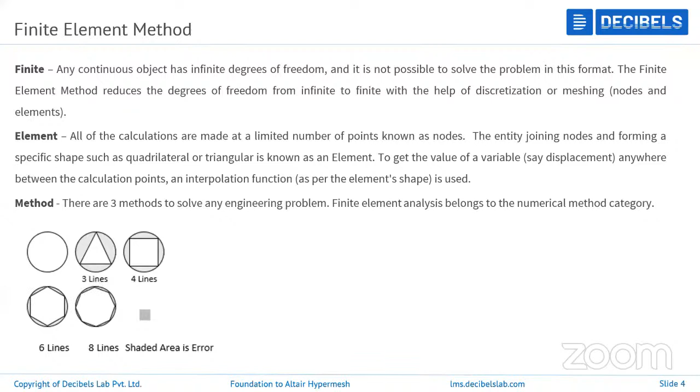Since we are using HyperMesh as our preprocessor, all our major work will be done in HyperMesh, starting from importing the CAD. HyperMesh is a pre-processing CAE software, and this is not a design software. The design software are separate, like CATIA, UG, ANSYS, and so on. The CAE softwares are HyperMesh, ANSA, ANSYS. So these are the pre-processing softwares.

So basically, in Altair HyperMesh what we are using, first we will import the CAD. For that CAD, we need to do some cleanup as it is done in the design software. So we need to modify or edit the geometry as per our requirements.

After doing the geometry cleanup and all, we are going to create the elements on it. That is called meshing. Meshing means we are going to create the elements based on the component or based on the requirement.

For example, we have 1D, 2D and 3D elements available in HyperMesh to build any kind of geometry. From the 1D component like a bar element, rigid bar element, beam element, to sheet metal components which are the 2D components, to the solid ones. By using these 3 kinds of elements, we can build any kind of meshing or model. After doing the meshing, we are going to assign the material properties based on the project requirement and based on the component.

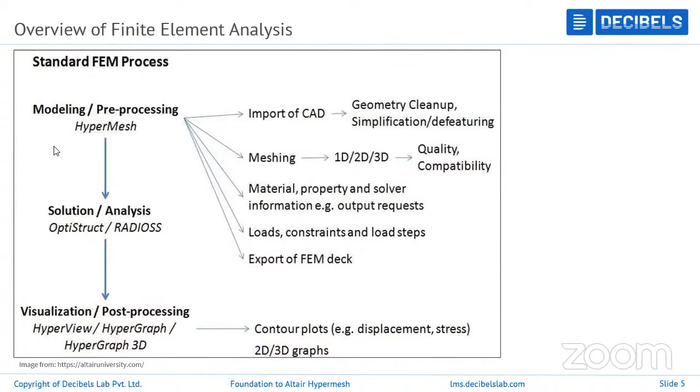This is the standard finite element process that every CAE industry is following to build any model from scratch to the results. This is the process which we are following.

The designer is going to build something, then it will go for manufacturing, and then for production, then for distribution it will come. So what is the necessity of CAE? The necessity of CAE comes from the earlier sections, or in the previous years.

A designer will build the CAD data, and it will come for the virtual test, then it will go for manufacturing. After the manufacturing, the prototype test will be done, like before releasing any automotive parts or anything.

Now the CAE industry has occupied everything rather than just automobiles. Say for example, for mobile applications or household applications, even for television sections, electronics items, it has occupied everywhere. So after designing, manufacturing, and building, we need to test it.

Say for example, a crash test or durability test, or any other test. So we need to create one prototype for that. Then we need to test that. Only after testing can we release it for the market. If it fails in the test, it will again come for the designing process. We need to follow the same steps again.

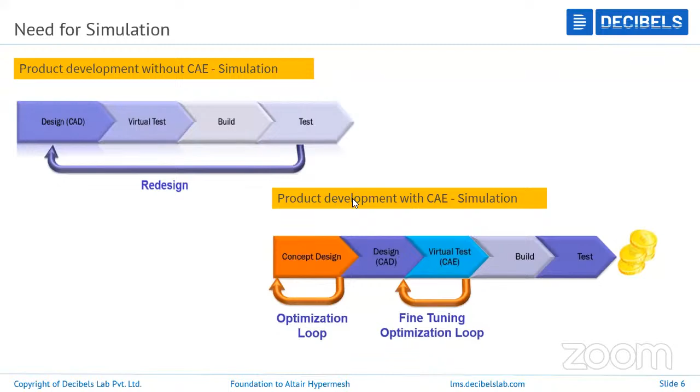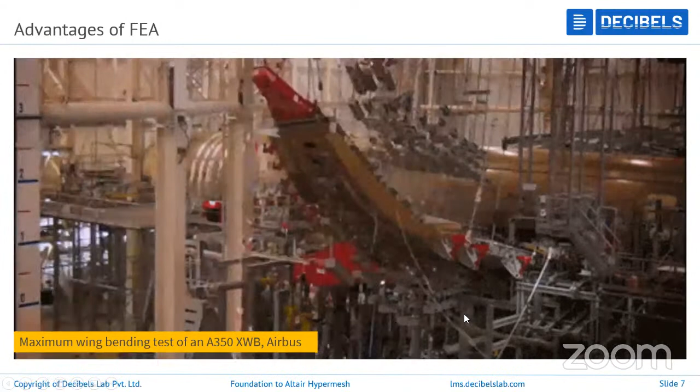There are so many processes if you are not using the CAE software. But the same thing can be done virtually using CAE software. As I said, you can change the stiffeners by adding ribs, changing or increasing the thickness, or using a higher Young's modulus value, all within the CAE software. This is a major advantage of using the CAE software.

So by using any software, you can build this and build the virtual test data. You can get all the data you want based on your priorities, then you can set it for manufacturing, then take it for the prototype. This is a practical example so that you can understand why we need CAE software. This is the theory, the fundamentals behind using finite element analysis or any CAE software.

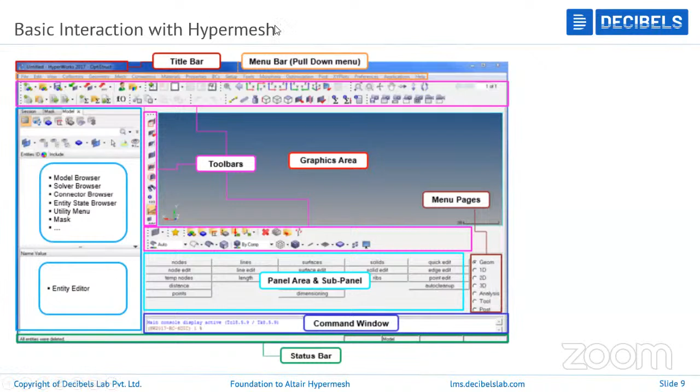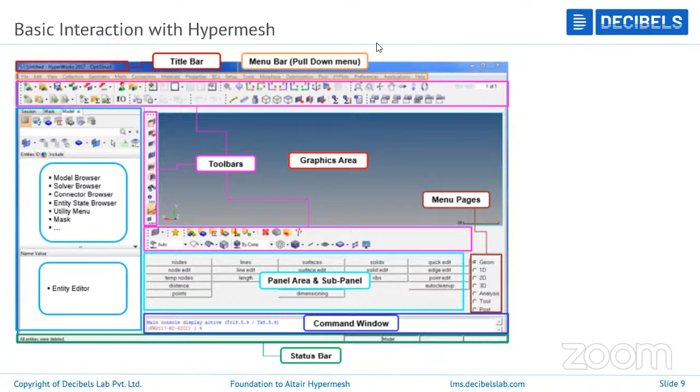Next, we'll move on to HyperMesh: what HyperMesh is and how the HyperMesh window looks. The image you are seeing here is how the HyperMesh window looks. Here you can see the version of HyperMesh in the title bar. These are the menu bars, and we also have toolbars. Here you can see the version of HyperMesh, and it is showing OptiStruct. OptiStruct is an Altair solver, a solver platform we are going to use to solve durability analysis.

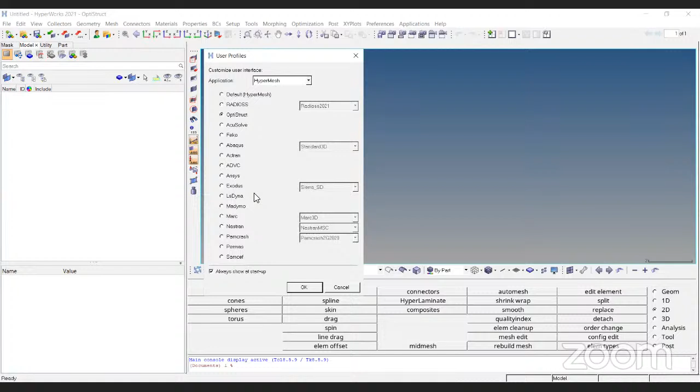If you click on the user profile, you can see all these different user profiles. Since HyperMesh is solver neutral, it supports software which is not built by Altair, that is, external software. These are the external software that HyperMesh supports. HyperMesh is a very good pre-processing software, one of the major software we use in the CAE industry. This is the profile bar, these are the profiles we can set, and this is the menu bar.

In the menu bar, you can see File. If you want to open a file, save a file, or open a new window, all these operations can be done in File. Then there's Edit and View controls. In View, this is the view bar, and you can keep whatever views you want. The same names will appear here also, like new file or opening a file. If you go to open a file, it will ask which file you want to open and the file type. It should be a HyperMesh file.

As we know, anything you want to open in any software, the extension should be the same. So for example, if you want to open an Excel file, it should end with the XLS format. So likewise, if you want to open the HyperMesh file, that should end with the .hm file. That's what it is asking. Then we can go for the saving option. Then the important one is the import export options.

These are the menu bars which are available in HyperMesh. See, the toolbar: if you are familiar with the toolbar, it is good to work with any software. This is a toolbar, and these are the periphery icons of HyperMesh. This is for the mask window. This is for the assembly, creating any collectors, or if you want to create any load collector, system collector. These are the periphery icons which we will be using very frequently. If you want to keep it in a part view, component view, or property view, these are the periphery icons.

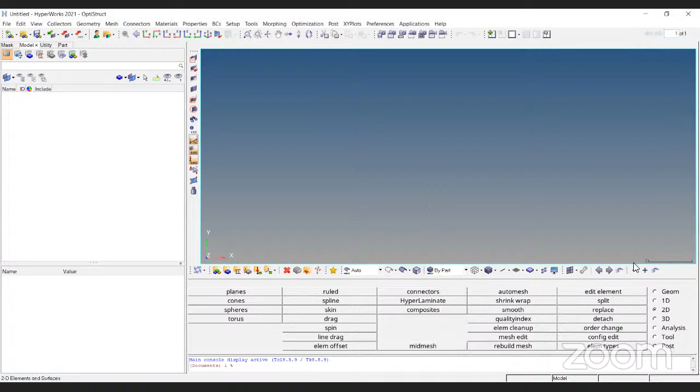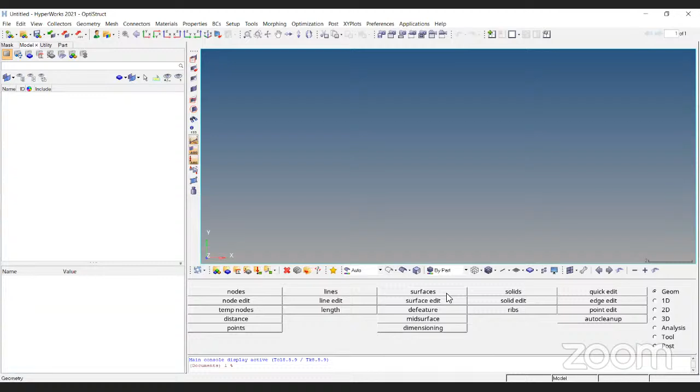And these are the different menu pages. If you want to work with the geometry, use the geometry page, or 1D page, 2D page, 3D, analysis, tool and post. These are the 7 different pages. If you click on any panel, say I'm going to use the surface panel, a sub panel will appear. It means inside the surface, if you want to create any surface or delete any surface, those things will be available in the sub panel. This is the panel and this is the sub panel.

Then if you want to run any macros, you can run it here using this bar. Then the status bar is there. This is the status bar. As you can see, I'm in the geometry page, so it is showing the geometry. And this is the model tree and entity tree. I'll show it in a different section.

As you can see, this is a model tree. The geometry includes surfaces, lines, points, nodes, everything. All things we are going to keep in components. We can see in the model tree components, load collectors, load steps, material data, property data. Every data will be available in the model tree. Then if you click on any particular component, the entity will appear. This is the entity view. Entity means inside the components there are other things, for example the name of the component, the ID, the color. If it is defined by any properties or material, those things will appear in the entity bar.

These are the main menu icons which we know in HyperMesh: status bar, menu bars, model tree, entity tree, and the panels and subpanels in the different pages. These are the basic menu bars we should know.

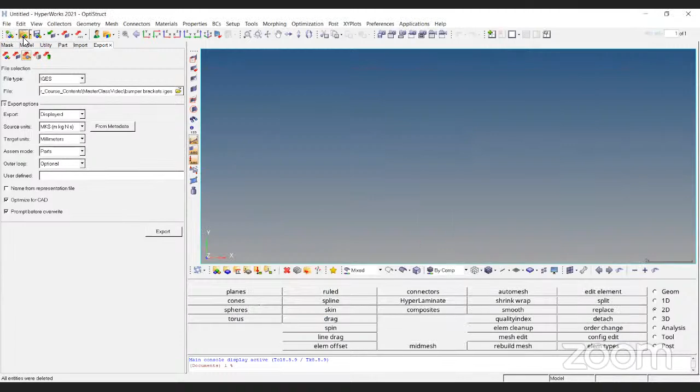First I'll go with opening the file. If you click on open file, it will ask whichever file you want to open. I'm just opening one file. Just open, set the destination, and select whichever file you want; it will open.

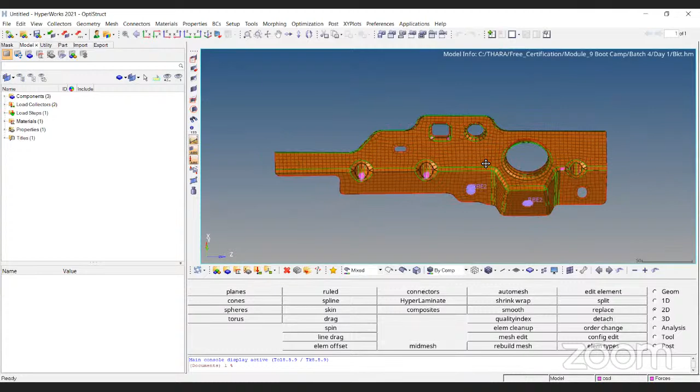As I said, the information will be available in the right corner. Just use the keyboard F button; it will fit to the current window. I'm using the Control button with the right mouse button just to move around the screen.

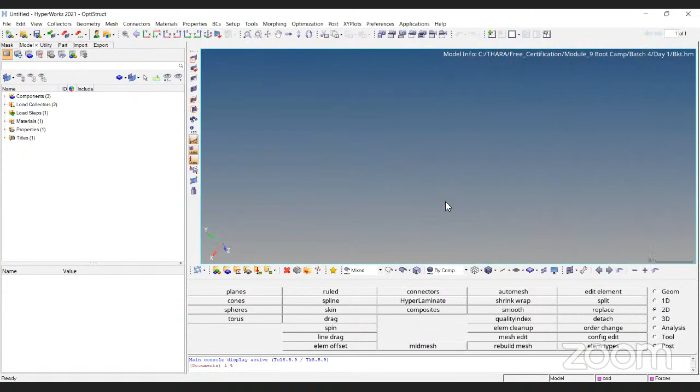Control with the left button, we can zoom in and zoom out. Control plus left button, you can do these operations. Then if you see this component, I'm zoomed so much. To bring it back, just press the F button; it will fit to the current window.

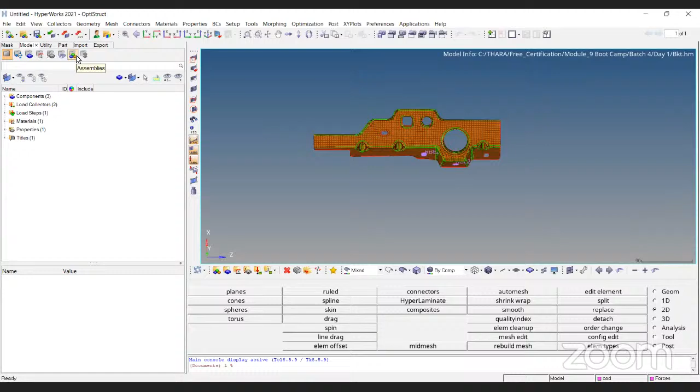For panning, to move around this window, you can use Control plus right button. Control plus left button is used for zoom in and zoom out. Then sometimes we need to fit it in some particular views. See, this view option is there.

You can set it to the XY plane, ZX plane, or ZY plane, or isometric view, top view, front view, like that. Whichever view you want, you can keep it in that view.

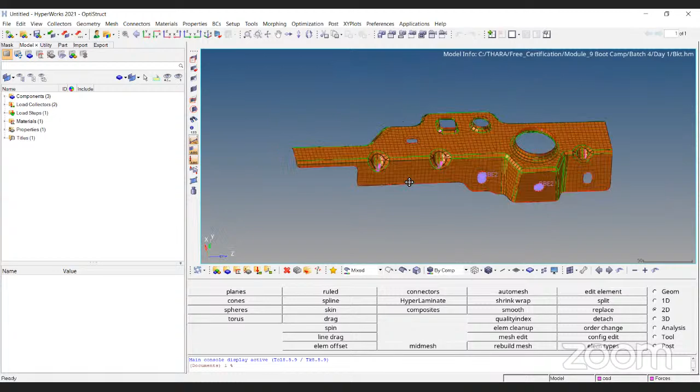Then what is a component? Basically, I'm having this geometry. On this geometry, I'm going to create some nodes or elements. To store the elements and the node data, I need something that is called collectors.

How to create the collector? You can go here and create. I'm going to create one collector. You can give the component name, set the preferred color, and say create. After doing this, the collector name will appear in the model tree.

See, here I'm having the three collectors. After creating this collector, it will appear in the model tree. Basically, the collector means I'm collecting the node data and element data. I'm storing these two in one thing that is called a collector.

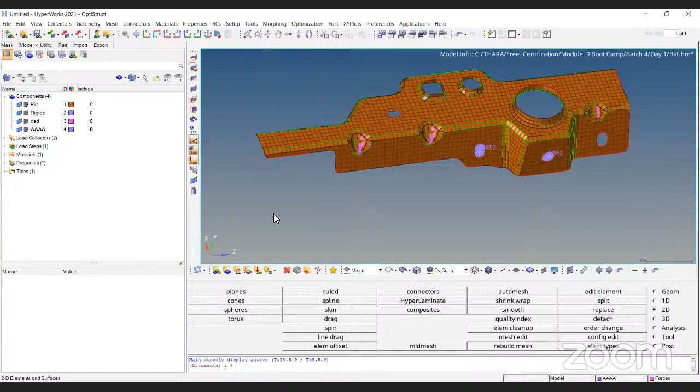In the collector, you can save the nodes, elements, or you can save the geometry also. The flag symbol you are seeing here is meant for the geometry, CAD, or surfaces, anything related to the geometry. If you click on it, I'll just mask the elements. I'm displaying only the CAD surface.

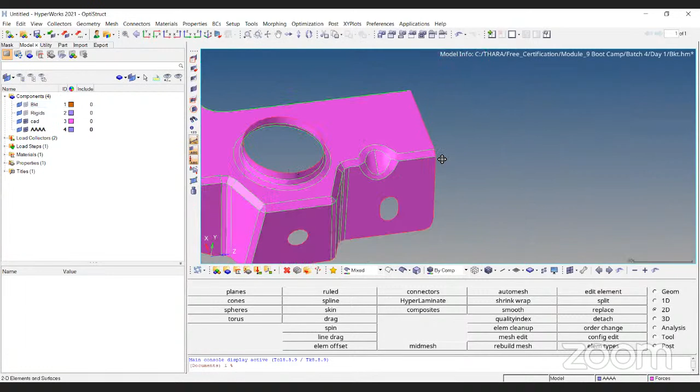You can see this is called the CAD. The flag symbol you are seeing here is meant for CAD. Representing CAD means it contains lines, surfaces, those things. Then this four-element box shape represents the elements.

If you click on that one, just do a mouse click, it will appear. If you click off, it is hiding, it means it is not showing these things. See, this is called the elements. This is meant for elements.

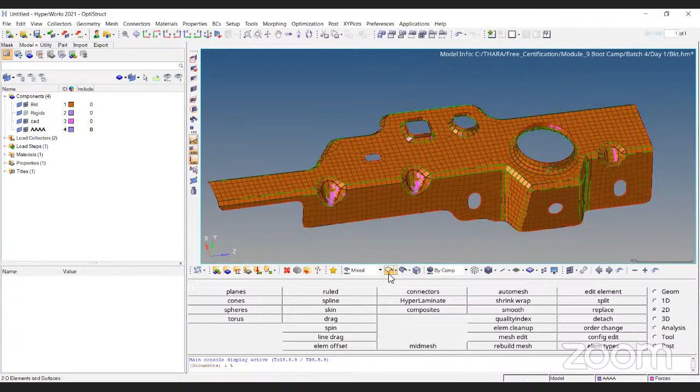The same elements you can keep in a shaded mode or wireframe mode. I'll show you. Now I have kept my geometry in a shaded mode. Here in the icon, you can keep it in shaded mode or shaded geometry. It means it is not showing any lines.

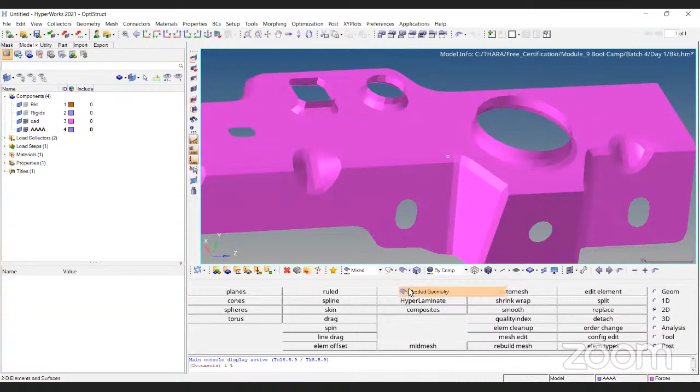So like this you can keep it, or else you can keep it in a wireframe. See, this is called the wireframe. In the wireframe, we can see only where the lines are. We can see only the lines.

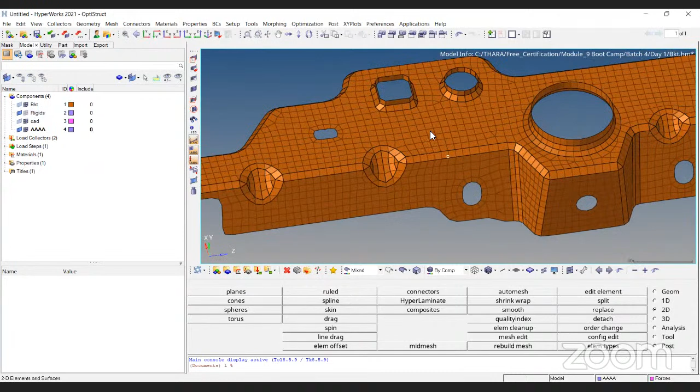Then next comes the elements. So how do the elements look? The same thing is available in the icon. If you want to keep it in a wireframe, click on this one. See, this is a wireframe. Wireframe means it just looks like a mesh. It is not showing any surfaces. See? Like this it appears.

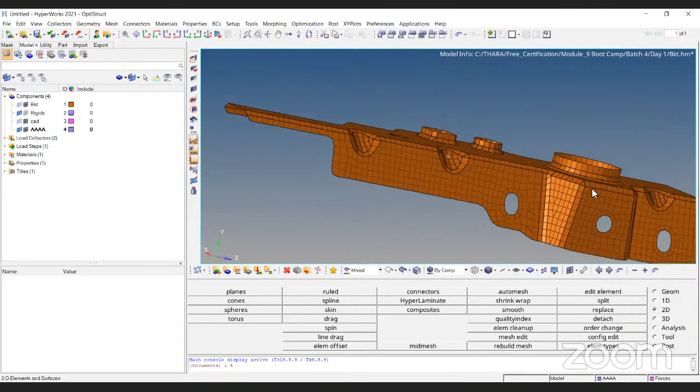This is the basic idea behind how the geometry and the elements look in HyperMesh. Then we'll move on to what are materials and properties. If you click on any properties in the model tree, it will appear. You can change the name of this one. You can create any properties, like shell, material. So we need to assign these parameters in the properties.

The same properties you can create here also, or else in the model tree you can define them. Go to the model tree and right click. You can create assemblies, properties, materials, and other things, for example system collector, load collector, laminates, groups. All those things you can create. And here also it is available: materials and properties you want to create are available in the menu bars also.

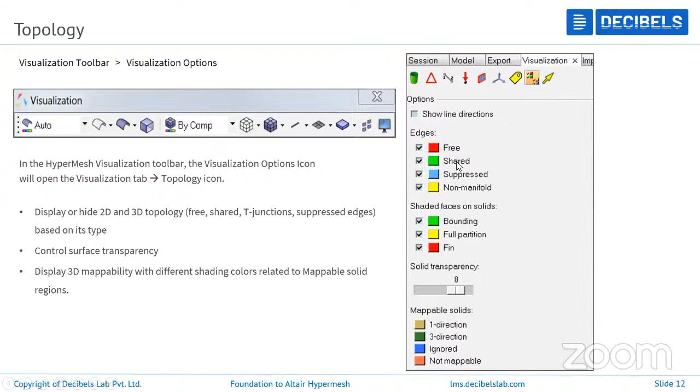Next, we'll move on to topology. What is topology? How the geometry looks. As we just saw in the visualization bar, the shaded mode and the wireframe mode come under topology. How the topology looks, what all these lines represent, what the red line means, what the green means. We'll do all these things in HyperMesh. Along with that, we'll do some geometry activity. What is geometry activity or topology correction? We'll do it.

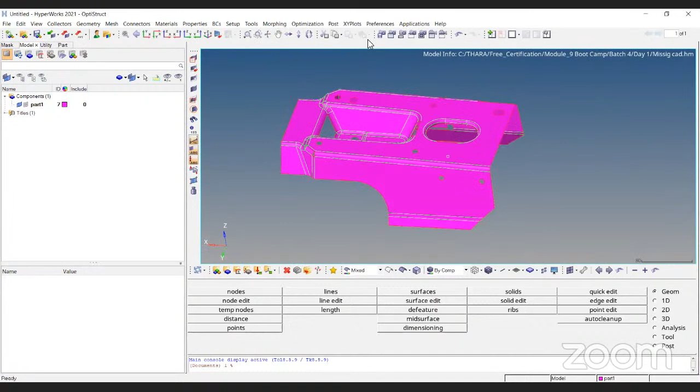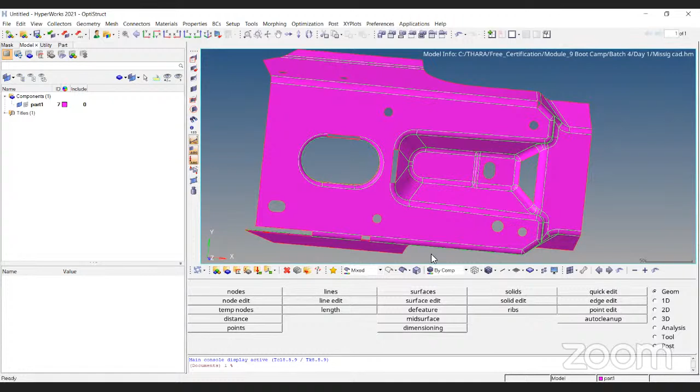I have opened a different component. If you open any CAD data, you can keep it in a preferred view. I'm keeping it in the XY plane, just fixing the model in this plane. As soon as you open any CAD data, topology comes to mind. Topology is meant for the CAD section. I'm keeping my component in wireframe mode. Just observe, in this view you can see some red lines and green lines.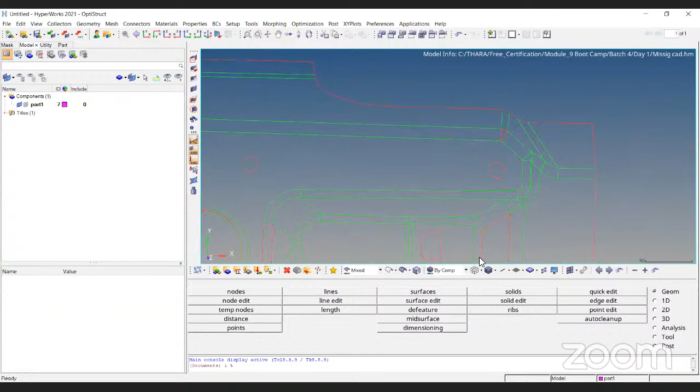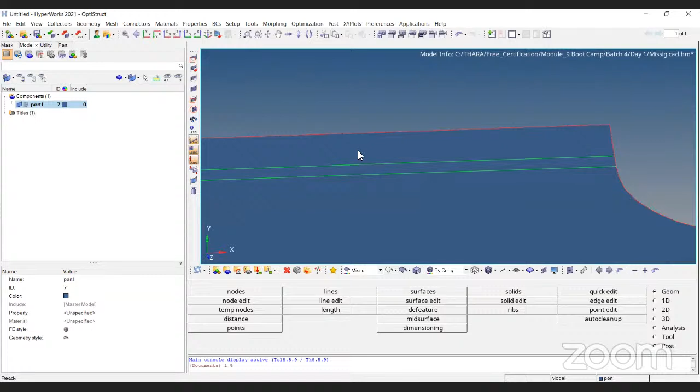What does it indicate? The red line you are seeing indicates the free edge of the component, meaning the boundary of the component. Let me change the color of this one. It is showing the boundary color. This is the boundary of this component; my component is going to end here. But inside this, I can see some green lines, which means the edge is shared between these two surfaces.

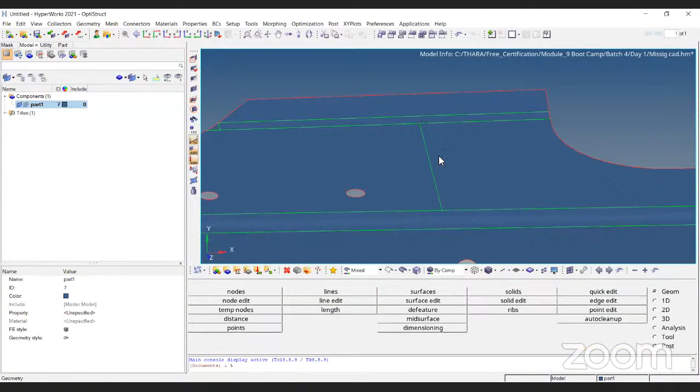I'm creating one extra line just for representation purposes. These nodes are shared. I'm just creating one line. Inside the surface, I can create any lines. But from this point, I cannot create any lines. The red line represents the boundary of this component, either the boundary or the free edge of the component. That is, this edge is not going to be shared with any other adjacent surface.

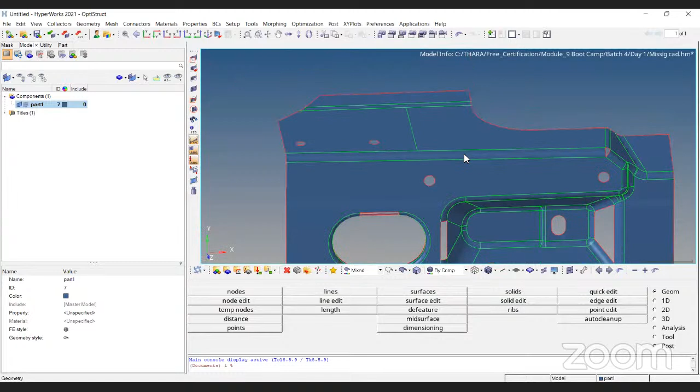So green means it is shared between two surfaces, whereas red indicates the boundary of the component. This is the basic idea. We should know what comes in the topology section. We can call it topology editing, geometry correction, or CAD correction. These are the different terminologies we use in the CAE industry. We now know the geometry representation. Then we'll move on to some geometry activity.

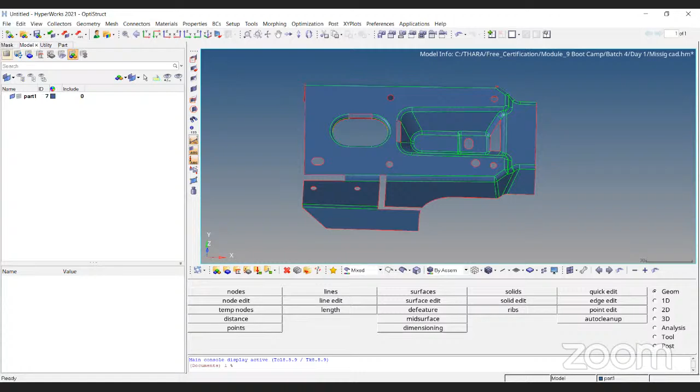In the geometry activity, what we should know is that before starting any work, there are some prerequisites. Before you start meshing or creating elements, you should analyze the CAD and come to a clear picture. Once the CAD is ready, only then can you start the mesh. So how do we rectify or correct the CAD? I have just opened one file.

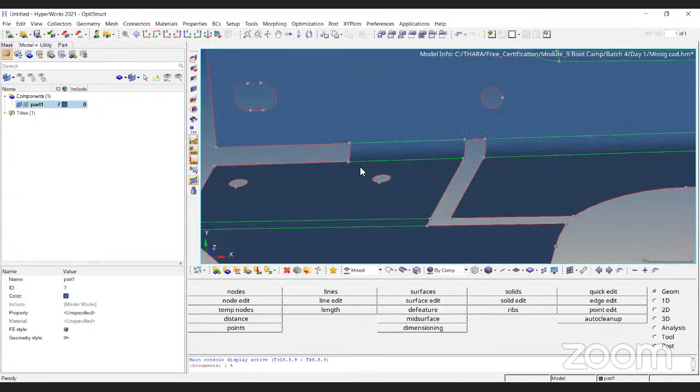In the visualization icon, I'm switching on the points. The gray dots you're seeing here indicate the points. There is a difference between a point and a node. I'm just showing: the yellow ones you're seeing are the nodes. The gray ones are called points.

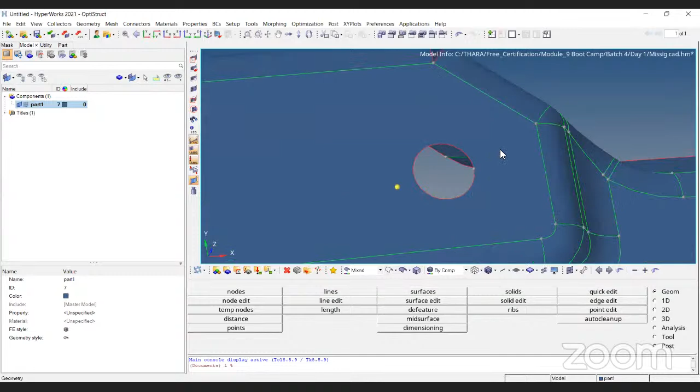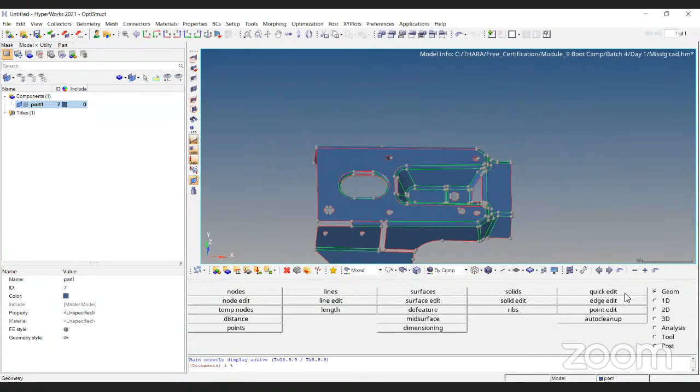I've just opened this CAD and switched on the points. By going with the points, I should start analyzing the component - what things are missing in the surface. Since we are importing this CAD, which is not built by ourselves but by the design engineer for us to do the meshing, our project requirement may be different, or there might be software compatibility issues. There could be missing surfaces or duplicated surfaces. So we need to check the surfaces and analyze the things. As soon as you open any CAD file, we should start searching - what are the things which are not required?

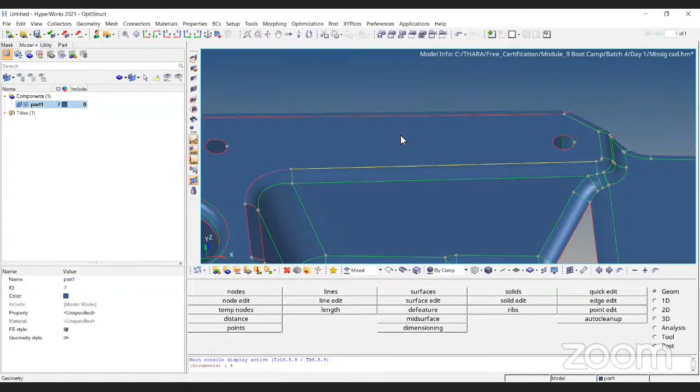See, I have just duplicated one surface. See the yellow lines - it indicates the duplicating surface in HyperMesh. Red means free edge. Green means there is a shared edge between the two surfaces. Yellow means it is duplicated, the line is duplicated. So all these things I should take care of before starting the meshing.

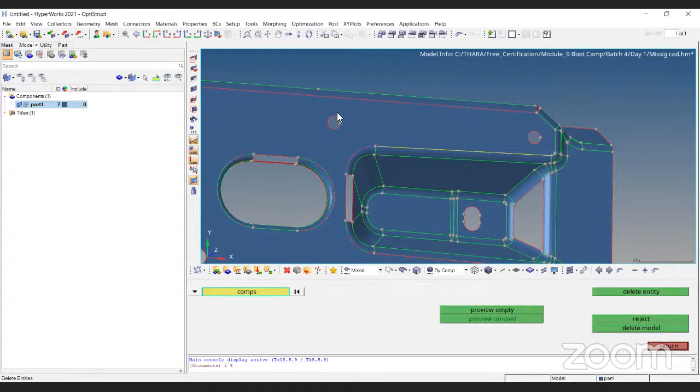First I'll go by deleting the duplicating surface. The deleting option is available in the functional key F2 - these are the major functional key options we should know. The F2 button we use for deleting the surface. You just observe - if I delete the surface here, the things are gone. Why? Because here it is not duplicated, I can see only the green lines.

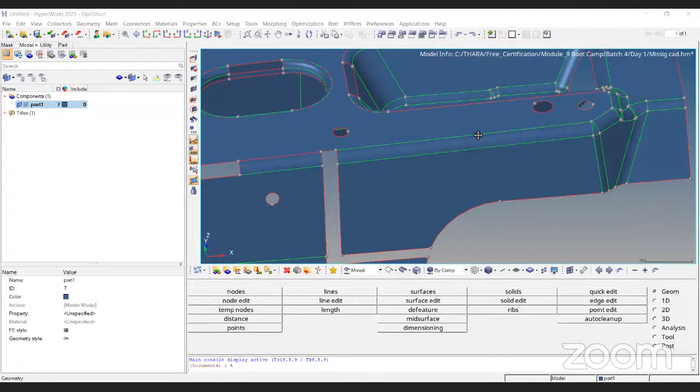But if I come here to the F2 button and click on this one, you can see some graphical indication of how the surface is acting - it means it is duplicated. Say delete entity - what I did, I just deleted the surface. Why? Because that is a part of the geometry cleanup that I need to take care of before proceeding for the meshing.

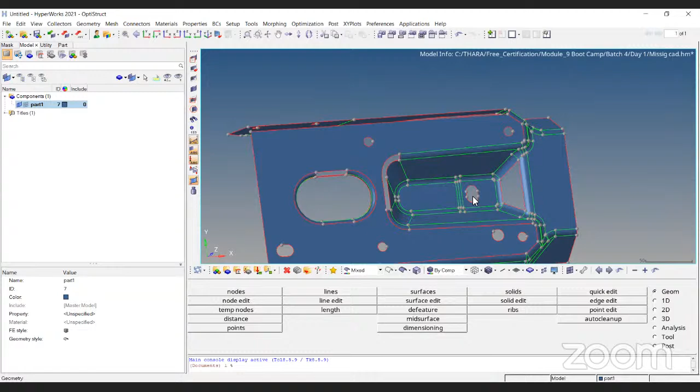So what we are doing in the topology correction is deleting the duplicated surface, deleting the unconnected surface. We need to create the surface, we need to create the other surfaces which are required. So one operation is done.

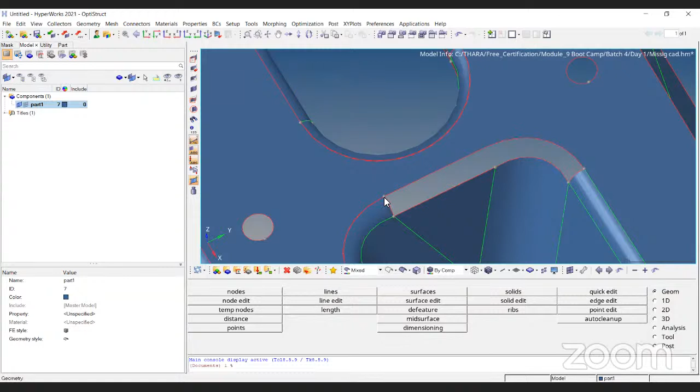Next, I can see some red line in between the component - here one circle is coming, and it is a valid reason. We have seen practical examples of the component containing some bolts or nuts, so the circle is coming. The same red line appearing here means it is a missing CAD - I need to create the elements but I don't have the surface, so I need to create the surface.

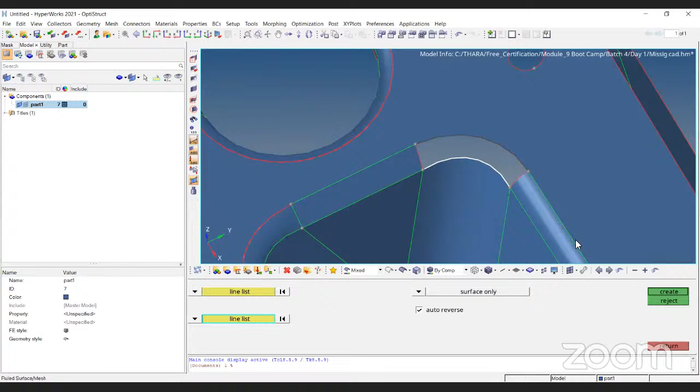How can I create it? I'm going to the 2D page, using the ruled option. I just want the surfaces. In this dropdown I'm choosing lines. Now select the line - from here to here I want, and I'm choosing this line also, say create. See, the line is created. Like this, here also I'm creating - this is my first line and this is my second line. Say create.

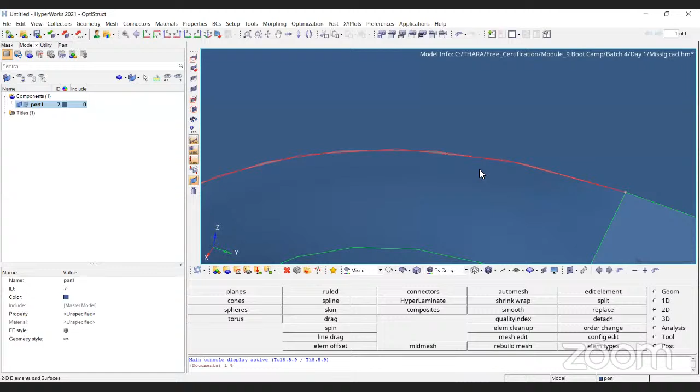You can ask me one more thing - here the surface is missing, so there is a reason for the missing surface. But here the surface is there, but still there is a red line. It means these two lines are not stitched, not connected. See, I'm zooming the component - you can see the gap between these two surfaces. It means the surface is not stitched.

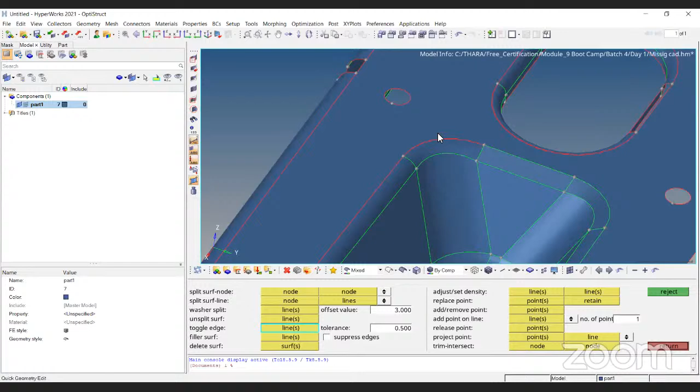How to stitch or connect these surfaces - go to the geometry page. This is the quick edit page, quick edit panel, one of the important panels we use for the major geometry corrections, available in the geometry page quick edit option. Here the toggle option is there - just click on this one. See, I'm stitching the lines. So this geometry correction is also done. I'll come here and stitch it here also. So like this, you need to correct it.

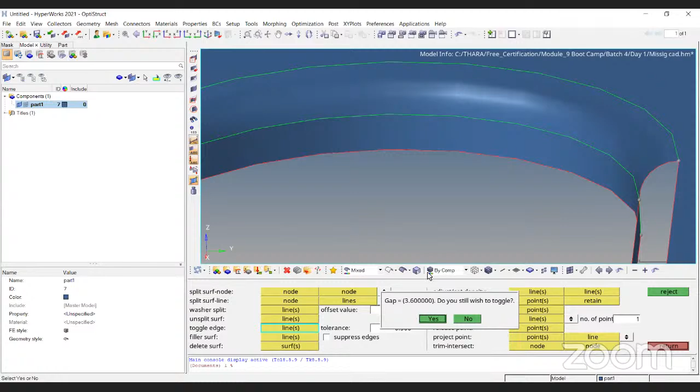But if I do the same toggle here, it is not going - it is asking for the gap. So this is not the correct way, don't do this. And if I come here and click on the toggle, see, I cannot toggle this one. You can observe in the status bar, I couldn't stitch it - the gap is showing 289. It means here I cannot stitch it.

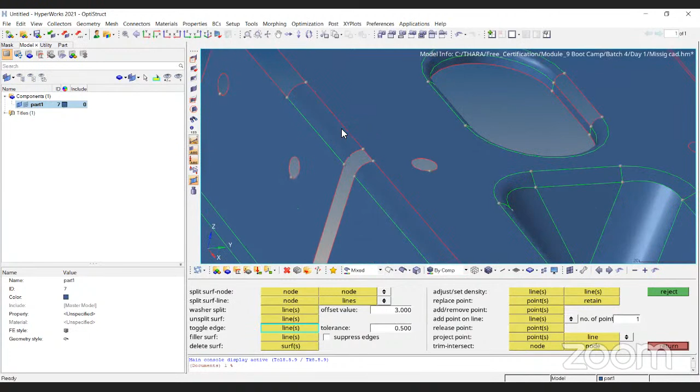So here the stitching option will not work, but here it will work. See, in HyperMesh we should analyze the things, how we can correct the geometry. Okay, we have corrected this geometry. Now here also I can see some of the surface is missing.

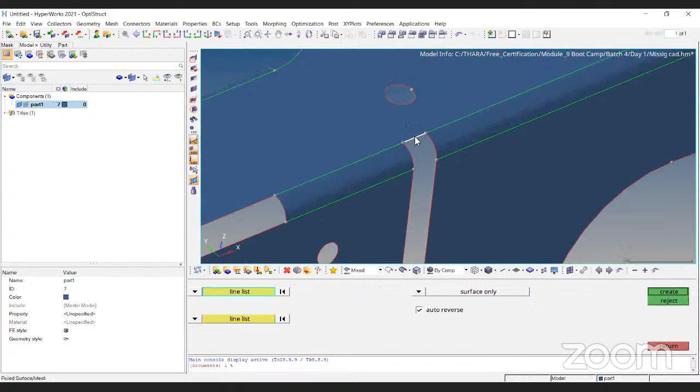So either you can go by the 2D ruled option and fill this surface like this. See, surface is created. One more option is there: go for the geometry page, the quick edit panel only. Filler surface option is there. Either way you can choose anything and it will fill it.

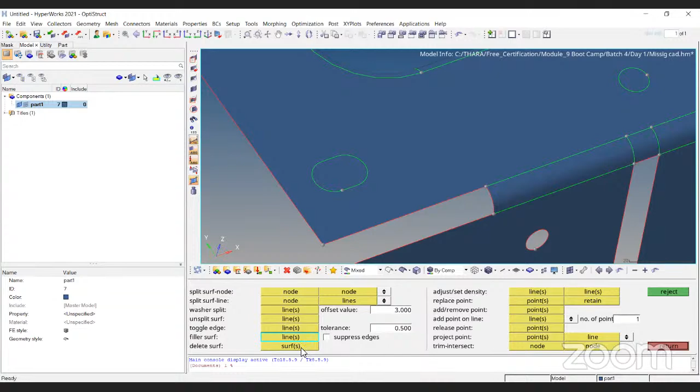See, if you go and click on the circle, the surface is going to create. Likewise, if you want to delete anything, here only the delete option is available. Delete the surface - it will not ask you a second time or give you a chance to select the other thing. Directly it will go and delete.

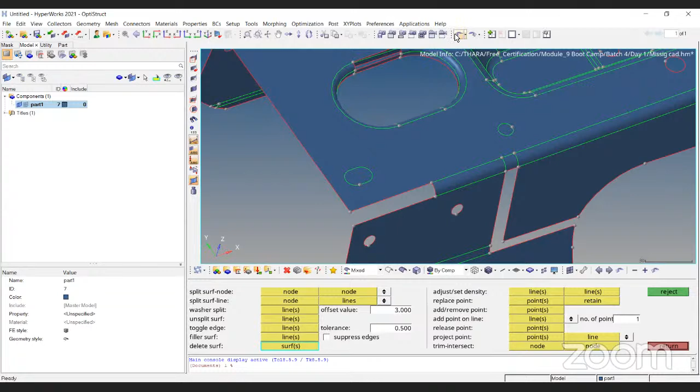So HyperMesh has some undo and redo options. You go for Control Z, you will regain the surface, or it will retrieve the surface. The same option is available here also for undo and redo. The delete option, the surface delete option, is available in the quick edit panel also.

The same thing is available in the functional key F2. The functional key F2 is meant for deleting. So what all can you delete? The operations you can work on, like creating elements, surface, load collector, properties - likewise you can delete all these things. You can come for F2, select whatever you want to delete.

It is available in the Tool page. See, you can select whatever you want and delete it, or else go for the model tree. Select the component and you can delete it. See, here also you can duplicate or delete. These options are available in the model tree also, and in the F2 panel also.

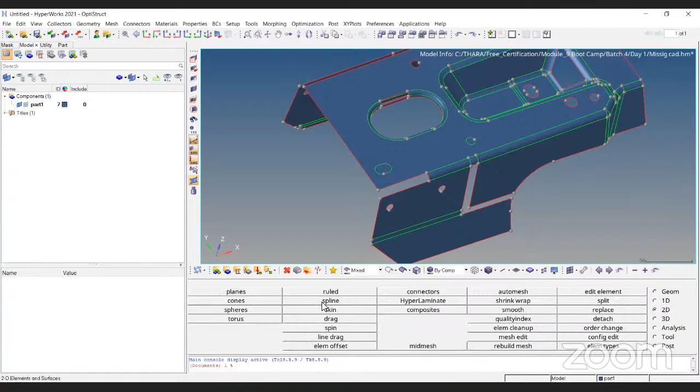I'm going to fill all the surfaces using the ruled option. Choose the line - one more time I'm showing. Choose this one and create. So likewise, you need to select all the lines and create the surface.

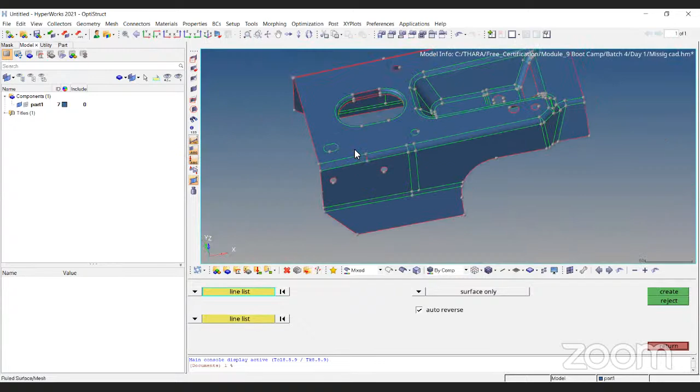See, I'm selecting all the lines whichever are required. I'm just creating the surface. Here also, you come and choose the line. This is the topology correction which we need to do before carrying out the meshing. See, in a single shot I'm selecting all the lines. In a single work, I'm doing all these things. See, it will create it.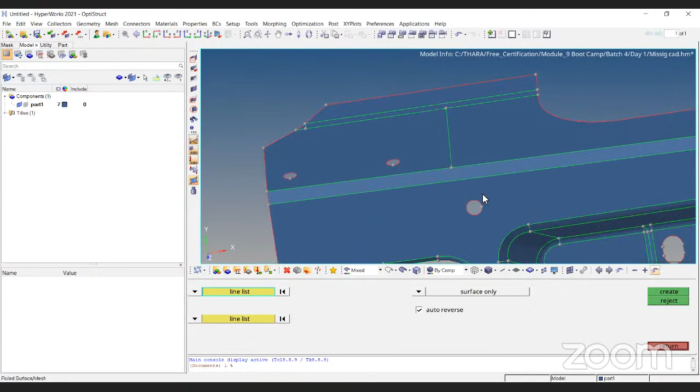Or else directly go for quick edit. Filler surface option also you can use to fill it. See, fill the surface, you can fill this one. Like this, you can do it.

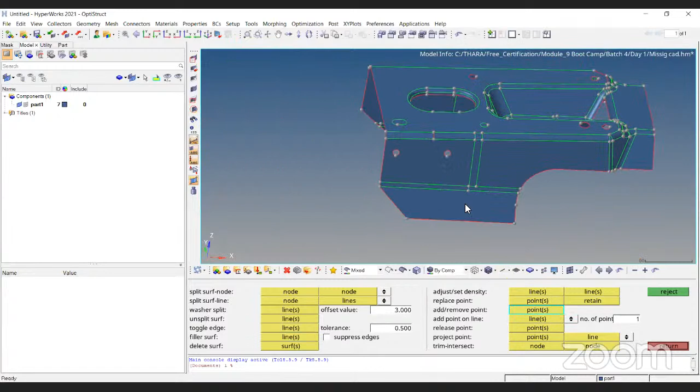And one more thing, if you don't want these points, you can go here - the remove option is there. Click on the right button in the mouse, it will go. See, this point will go. Why? Because this point is not shared between any other surfaces or any other lines. So it will go, but this point will not go.

See, I'm trying to remove this one. It is not going - why? Because this point is sharing between these two surfaces, or with this line, it is sharing.

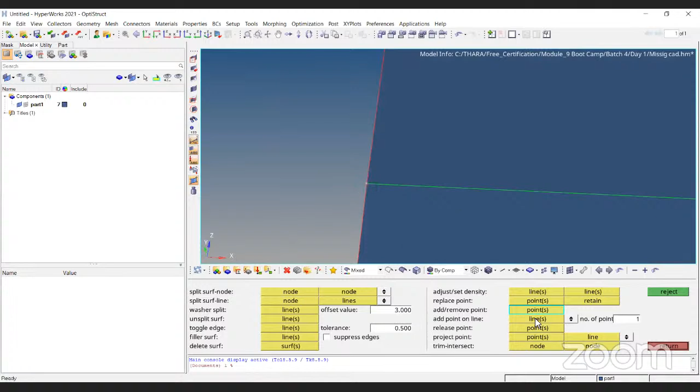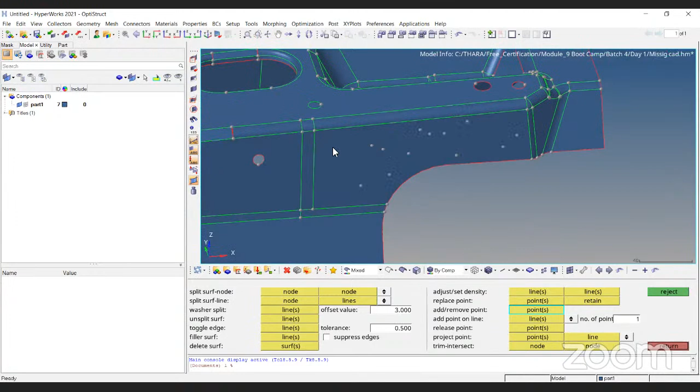Likewise, if you want to create any points anywhere between the geometry, you can create it. How to create it: click on the surface, hold the control button. Choose the surface, choose any surface. I'm choosing the surface, do a long click on the surface, then start clicking on the mouse. The points it will create.

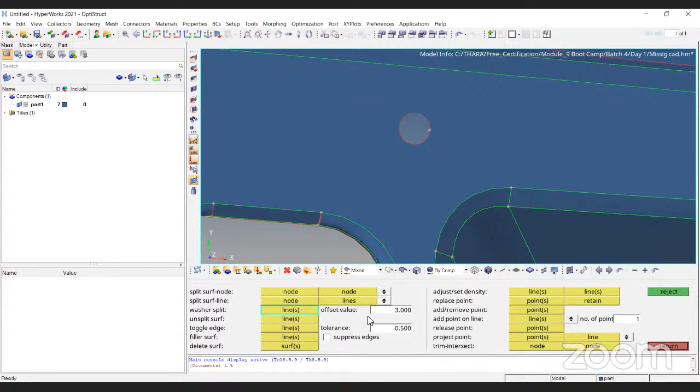So likewise, if you want to create any washer to represent any bolt holes, as we see in practical examples - to represent bolts or nuts, there will be some washer, a coin shape part that comes with the bolts or nut. That is called the washer. The same thing we can represent in the CAE software also: select the washer, give the washer value and click on this one.

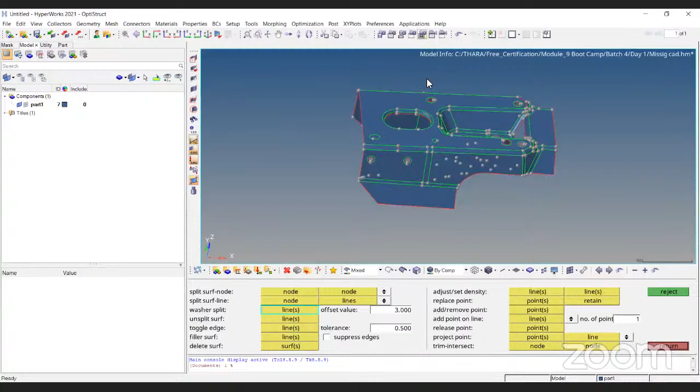Automatically, the extra line will get created. The extra surface will get created that represents the washer for this circle. These are the basic operations, the basic topology things we should know before we start doing the meshing or creating any mesh. Since we have learned the geometry edit option, in that we have learned how to create the washers and how to create the new surfaces and all.

And if you want to create any lines, see, I'm selecting this line and I'm choosing here. See, I can create the line like this. I can create it.

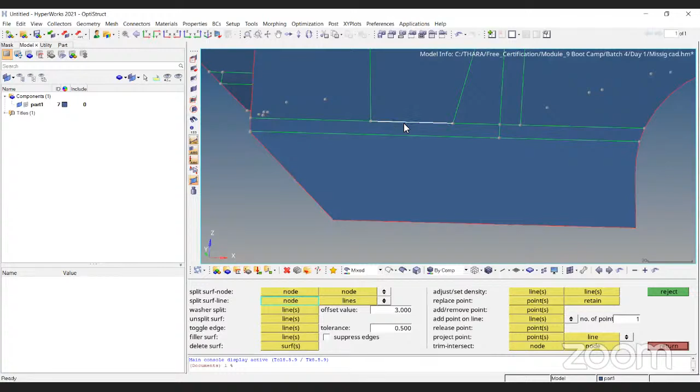But if you want to go for continuous line, that's the second option, split surf-node. Click on the node wherever you want to create it, and on the exactly opposite side, it will create the new line.

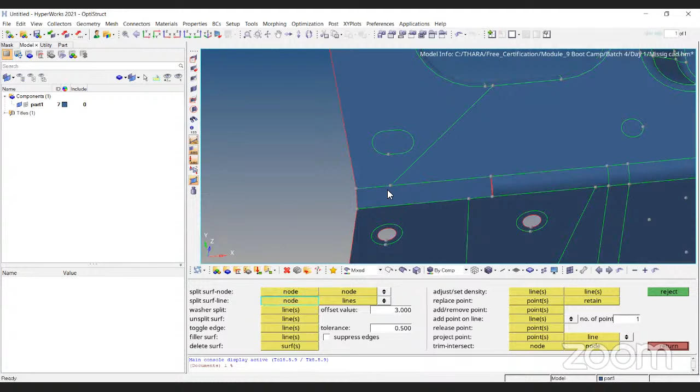If you want to create some nodes, some split lines from here to here, you can use node to node. But if you want a split line exactly on the opposite line, you have to go with the node to line option. By using this, you can split the geometry however you want.

Basically, finite element analysis is splitting the CAD, meaning I'm discretizing CAD to create elements. Why do I need to do topology correction? I want a correct geometry, a good geometry to create the elements.

If the geometry is very good, I will get good elements. If the elements are very good, the quality parameters will not fail. If the quality parameters are good for the component, we will get correct results. In short, the results of finite element analysis are directly proportional to the quality of the elements, and the quality of elements depends on the geometry. So if the geometry is good, you will get quality elements.

How do we get good geometry? By doing topology correction. Topology correction means deleting unconnected surfaces, duplicated surfaces, creating new surfaces required for the CAD, and splitting the CAD as per requirement to get good elements. This is the concept behind topology, and it's one of the major things we do before creating any elements.

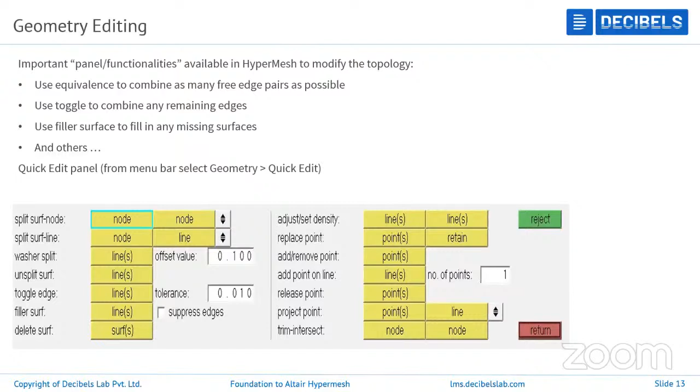Everything we've discussed is only for the geometry section—surface addition, surface creation, deletion, creating washers, creating lines, surface edit. These topology corrections are the geometry editing. We've also learned about file management, importing the CAD, view controls, and repairing the CAD, which is the topology correction or editing.

The mid surface extraction, we'll take up in module 2, where we'll learn why and how to extract the mid surface. I hope you understand all the concepts discussed on topology correction and finite element analysis—what should be taken care of for the CAD before proceeding for meshing. In module 2, we'll discuss elements and mid surfaces. Thank you.

If you have any doubts related to today's session, you can ask in the chat box, and I'll answer those. Thank you.

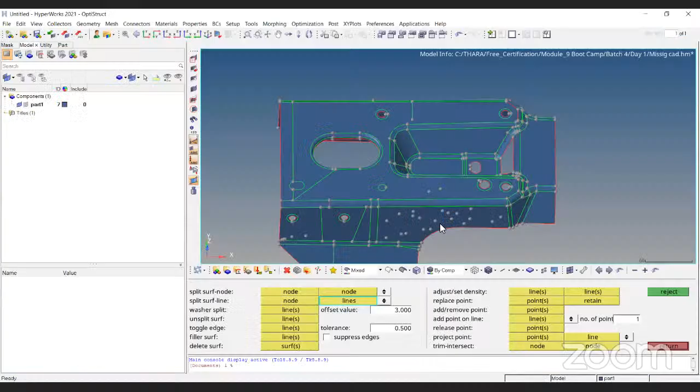Yeah, I'll show it again. Somebody is asking about filling the surface. See, first I will delete this surface. Directly I'll go for the quick edit. I'm deleting this surface here only.

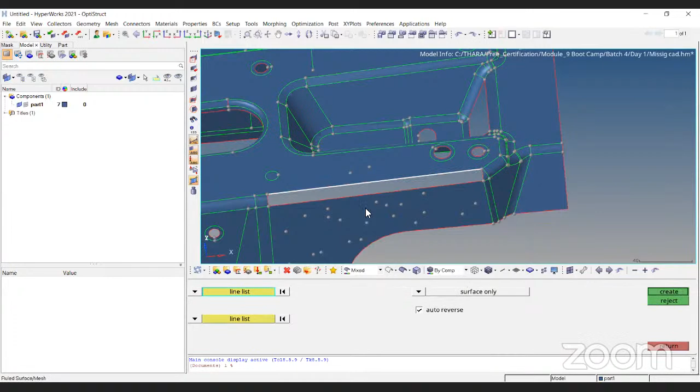I'm deleting this surface. Either you can go by filling the surface—see, the surface is filled—or else you can go for 2D, the geometry, the ruled option. This is the shortcut way: select the first line and select the second line and say create. Like this also you can create it, and again go for the geometry page for toggling this one. See, you toggle this, select the 2 lines and give some tolerance value.

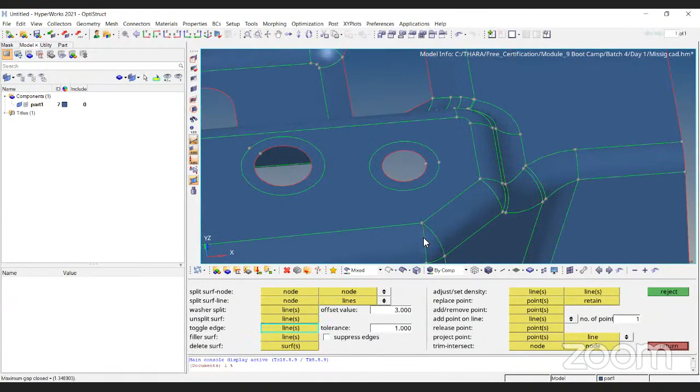Based on the tolerance value, these 2 surfaces will get stitched. This is how the toggle option works. Any other question related to today's discussion, you can ask in the chat box.

Yeah, for solid models also we need to do topology corrections. It is required for all CAD. Thank you. Any more questions?